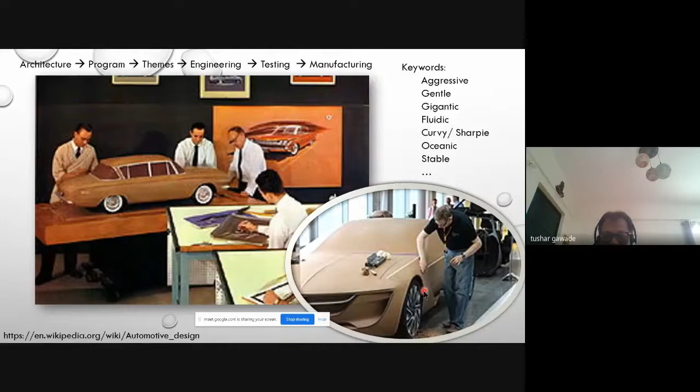So this is a specific clay. With the clay they develop it, and this is done as the physical reality, which is translation of the sketches to some 3D object. Now coming to what happens with the exterior - does the industrial designer's job end there? No, they get into the interior of the vehicle also.

Now, interior of the vehicle, what it means is that the vehicle has so many systems inside it. Now somebody says it's a stable vehicle - how do I translate that stable? If my vehicle seats look to me or feel to me a little tougher in terms of its stiffness, it is stable to me. Somebody says that I want a comfortable vehicle. Somebody can translate that comfort to the sponginess of the seat.

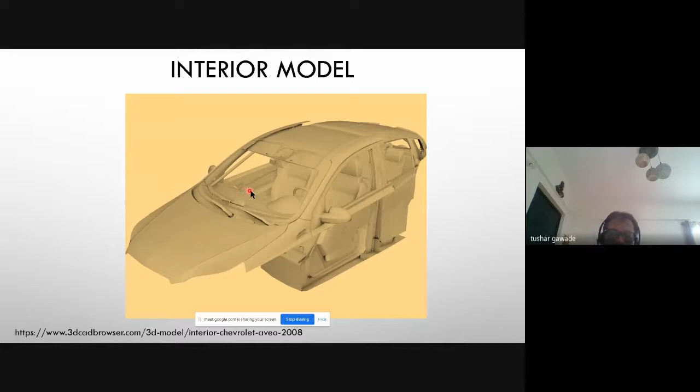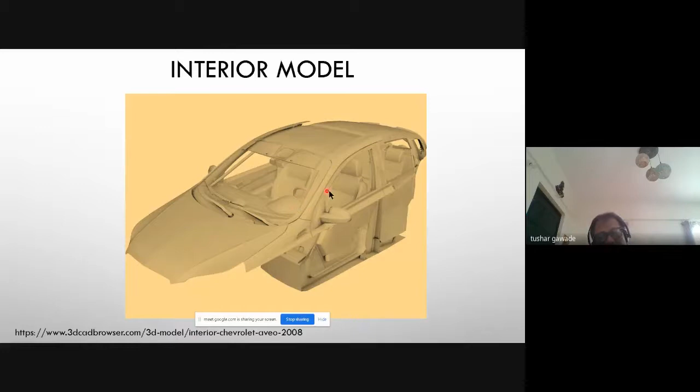Somebody can translate that gentle in terms of the steering wheel, how it looks in terms of the dashboard. So these are the translations of the company's requirements in terms of various systems, and that's the way it goes from exterior then to interior, from interior to individual subsystems. This is an example of one of the things - it's a body. So for body, this is some kind of rendition they prepared.

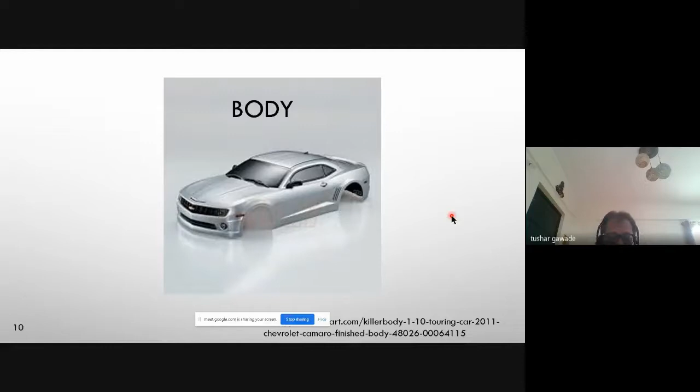After a brief of design, I get into the world of engineering. In the engineering world, they also develop some kind of models, prototypes, and layouts. What are these models, prototypes, and layouts? For the engineers, these are either the prototypes made with metal, wood, or some material which is a physical world, and they translate that to initially non-moving parts. Then they create the subsystems which have all the mechanisms and that thing.

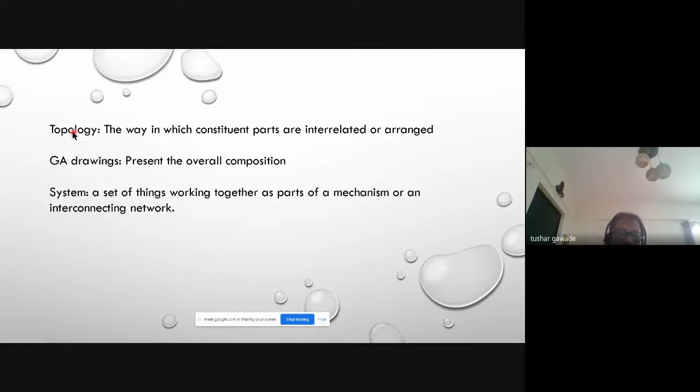Before going to the details of that, they also use some terminologies. All these engineers who translate - automotive engineers, mechanical engineers, electronics engineers, or mechatronics - the topology is the way in which constituent parts are interrelated or arranged, that's the thing. In general, from vehicle to vehicle, these do not change a lot. However, there would be innovations in terms of these arrangements, and making this arrangement makes the vehicle unique in terms of maybe the engineering aspect or maybe the customer related aspect.

The engineers develop the GA drawing, general arrangement drawings. It presents the overall composition, how the different systems are arranged. Now, when I say system, what I mean is a set of things working together as parts of a mechanism or an interconnecting network.

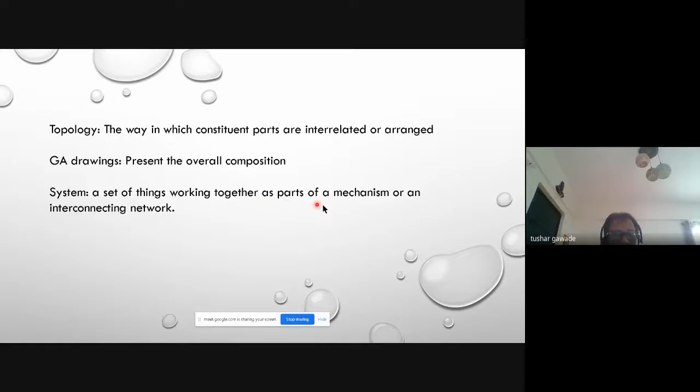The rigid chassis includes the frame, which is the basic structure on which everything is put. The seats are included. For the electrical engineer, those are electrical systems. For the safety engineer, those are safety systems. So there are so many systems - it's a complex machine which has approximately 30,000 parts. It's huge in terms of the parts and systems.

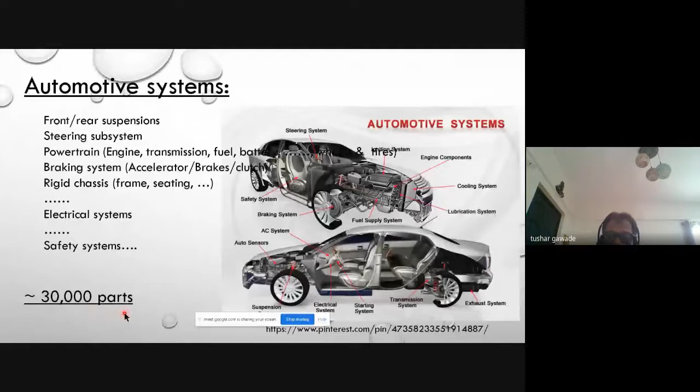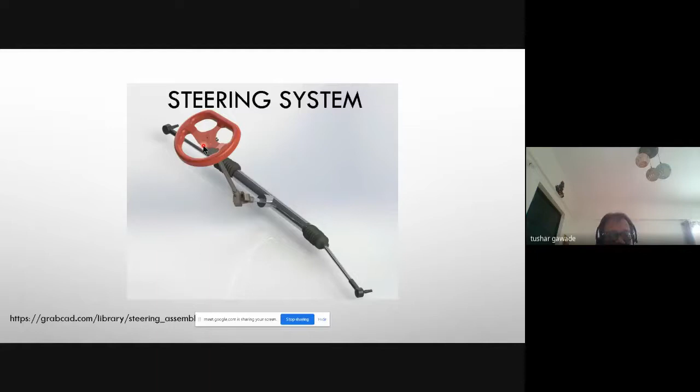I'll take one example to show you what it is. The customer looks at the steering as a D-shaped steering, maybe three arms, three spokes to the steering, and on the top of that there could be the interfaces for the customer, which are called horns. From there, these are the visible things up to the steering column.

After the steering column, it goes into the underbody of the vehicle, to the rack and pinion steering arrangement, and then finally through the tie rods to the steering system. Why am I showing these things? Because in the next topic we are going to need these systems.

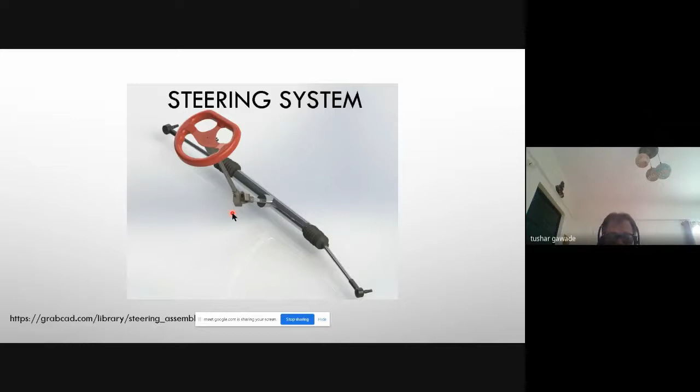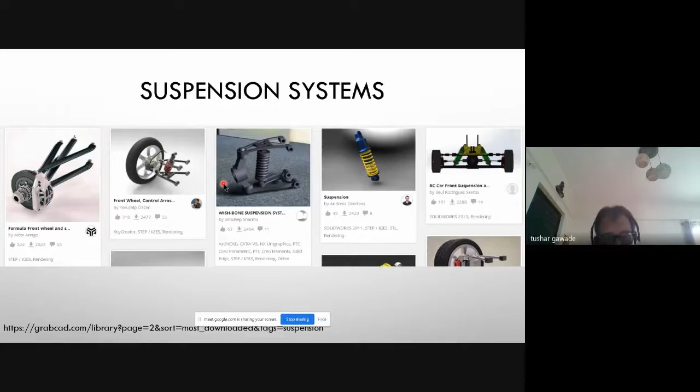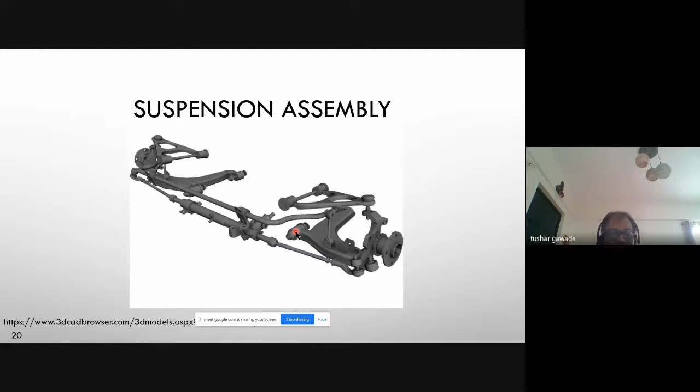Now all these points of attachment are required to connect with the next system. As I talked earlier, the vehicle is a combination of multiple systems. So all these individual systems are modeled by the CAD designer, initially as parts, and from parts they are connected appropriately with proper orientation and location. Once the CAD designer's job is over, the vehicle dynamics aspect is to be evaluated.

Before getting into the subject of vehicle dynamics, let's talk about what a vehicle is. It's a thing used for transporting people and goods, and especially we know these vehicles as cars, two-wheelers, carts, trucks, or any of those, maybe land vehicles. When I talk about dynamics, it's a branch of mechanics concerned with motion of bodies under the action of forces. So it has to deal with the forces.

The branch which deals with the mathematics of motion and forces, which I talked about here, is a branch of mechanics. So what is mechanics? It's a branch of applied mathematics dealing with motion and forces that finally produces the motion. So here the motions are concerned, here the forces are concerned.

There is something called multi-body systems. When I showed earlier, there are different parts. Those different parts are different bodies, so that's a multi-body system, bringing that system from the earlier thing. It's a study of dynamic behavior of interconnected rigid or flexible bodies.

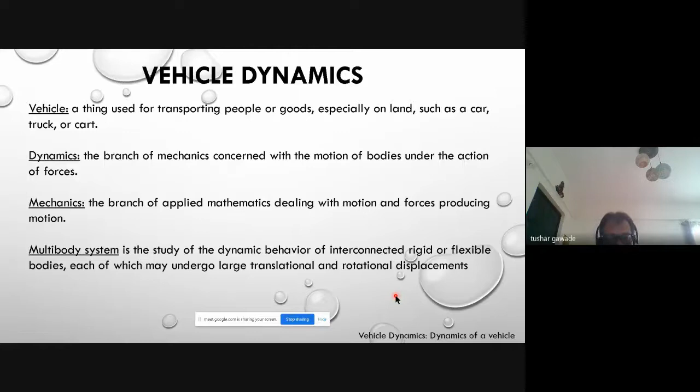As we saw, we have multiple systems interacting as a vehicle assembly. The parts are connected, we get subsystems. Now the subsystems we talked about earlier - if you talk about the transmission system, it will have an engine, and the engine itself will have multiple systems. Then another system will be the gearbox, then the drive shaft, then the wheels, tires. So multiple systems are there in the transmission system, and finally this transmission system is part of the vehicle assembly. So many parts, approximately 30,000 parts, give rise to so many systems, and finally you have one assembly to deal with, which is the vehicle, and this vehicle is used by the customer in terms of its feel. Now that feel could be a comfort aspect or a handling aspect.

For vehicle dynamics, you really don't need parts with exact geometry, and visualization of all those parts doesn't need to be realistic. I already introduced the concept of components having joineries and different joints. If we know those joints, their locations and orientations, that's good enough for vehicle dynamics engineers to proceed. However, when vehicle dynamics results are being interpreted, visualization of all these parts adds to the reality, so somebody who is not from this world but understands the subject, from the automotive background, can understand it.

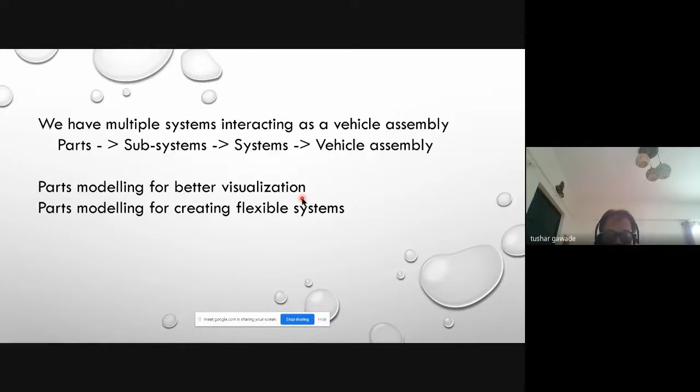Now why do we study vehicle dynamics? We study it to understand the behavior of the vehicle. Why understand that? Is my vehicle safe? Is it comfortable for the occupant? The vehicle moves on the road, so it has to take care of pedestrians and animals outside the vehicle. It has to be safe for occupants, and it should not harm outsiders if the situation or circumstances arise. That requires understanding of vehicle dynamics.

As we said, vehicle dynamics deals with the forces generated from the vehicle and motions. After understanding that, what's next? We improve the aspect intended. What are the aspects intended? For the vehicle dynamics engineer, it could be handling of the vehicle. For the safety engineer or crash guy, it would be safety of the vehicle. Somebody from the vehicle subsystems called seats would look at comfort. Somebody from noise and vibration background looks at noise. So there are many disciplines and expertise required to design this vehicle.

Now all these inputs of vehicle dynamics, for each respective discipline, require different input-output. So all those different input-output systems are modeled in vehicle dynamics, and the intended outputs -- safety, comfort, performance, noise -- are post processed by the respective engineers.

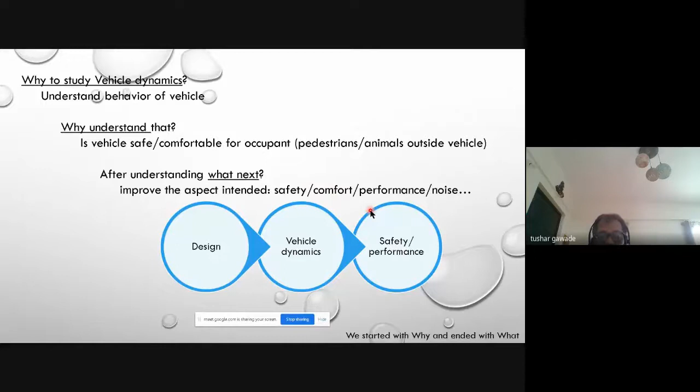Now we have started with design, we are now into vehicle dynamics, and later on we'll be going into safety or performance. So we started with why vehicle dynamics is required, and on this slide we reach what it is, and what's next -- how do we do this journey from vehicle dynamics to the next stage, which is the safety aspect.

Now for vehicle dynamics, there are two aspects. One is vehicle simulation, which happens inside the computer labs and includes the systems and full assemblies -- simulations carried out with the vehicle assemblies. For the testing people, it starts in the lab and happens in the field, called proving grounds or test grounds.

And finally, all this work which happens in the lab and in the field needs to be correlated. So finally we end up having only the simulation world, or the CAD models, mathematical models of the vehicle systems, and we remove or eliminate or reduce the testing world. Why do we need to reduce this? Because the cost involved is too high, the effort involved is too high, the people involved is too high, and uncertainties are also very high.

When I talk about uncertainties, that's the place where the testing world dominates in terms of engineering discipline. When we get to the validation slide, I'll come back to this statement -- that the testing world dominates, and that's called the expert riders, who have very high importance in terms of what they say, based on their experience of thousands of hours with the vehicle.

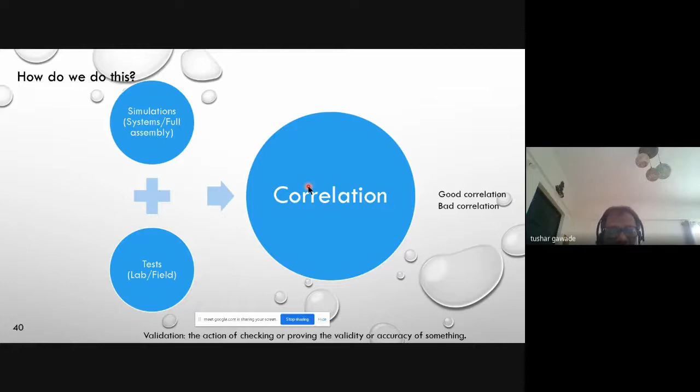So force and displacement of the spring in the simulation world, and force and displacement from the lab world, are brought to the same graph where x-axis is displacement and y-axis is force. We see the subjective nature of it, then go to the objective nature, the specific magnitude of force with respect to different displacements. Then we call it good or bad correlation.

The action of checking or proving the validity or accuracy of something is called validation. That's what I described as good correlation and bad correlation.

The things which are not correlating good, the models are updated so that the correlation is taken to the maximum limit or acceptable limit. The world of maximum limit has gone today; people call it acceptable limit, and within the acceptable limit, it is good to take decisions and move ahead.

We don't look for increasing the correlation from 90% to 92%, 93%, 94%, and so on. If 90% is there, in many situations the things are good to go ahead and take the decision. And that's the importance of doing simulations—you get quick results and quick directions to move ahead.

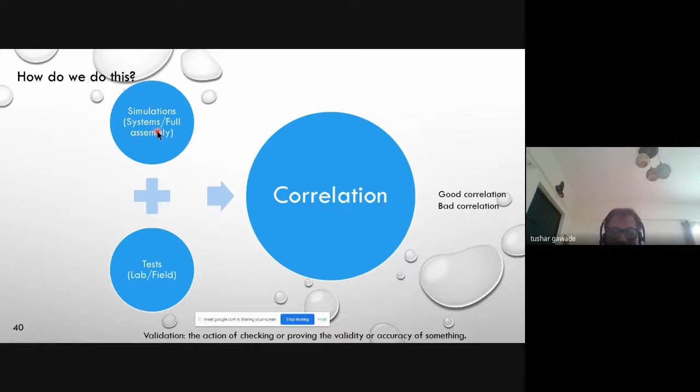Coming to the next aspect, which is the testing lab. In the testing lab related to the vehicle, what do we do? For testing of the vehicle, we look at various parameters. I have listed a few here.

The mass of the vehicle, mass of parts, mass of subsystems, center of gravity of all these—parts, subsystems, and the vehicle. The inertia related aspect, that is moment of inertia. Then for suspensions, we call it K and C—K stands for stiffness, C stands for damping.

The tire characteristics—this is a very complex world, and even the experts who wrote books on tires do not claim to understand this component 100%. They still say they are learning. Also transmission characteristics and steering gear ratio.

So these are different terminologies and characteristics required for vehicle dynamics to be understood, and these are measured in the test lab.

I am showing one example: suppose I have a vehicle assembly. With this assembly, I need to know at the vehicle level where the center of gravity of this vehicle is. This is an extract from the IS standard 13849. This is a four-wheeler—the front axle is here, the rear axle is here.

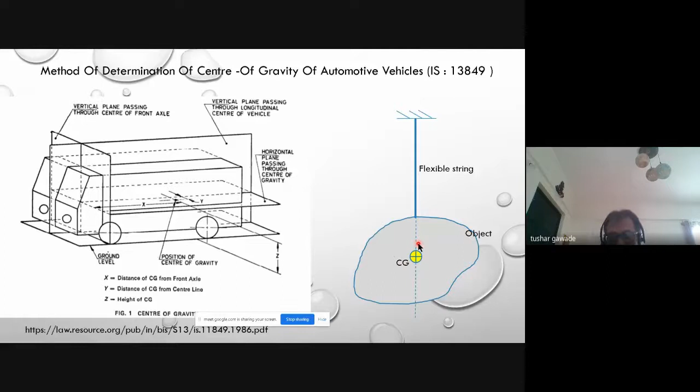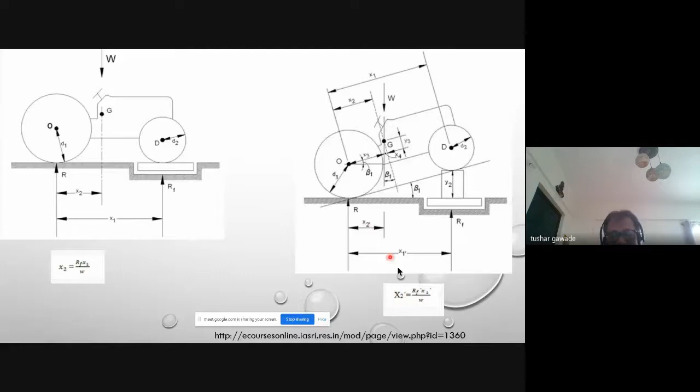Now the same equation appears to me as X2 dash is equal to RF dash into X1 dash by W. So my X2 dash would lie through this. Now I mark a vertical line through this X2, and wherever my earlier line was here, this is my earlier line and this is the new line; that point of cross section is my G, the center of gravity.

Now, if you do the same thing across the left and right tires, you would get its location along the lateral direction. But in most cases, the center of gravity for vehicles is at the central median plane. So it doesn't differ much because the systems are symmetrically placed, and it is quite in close proximity to the central median plane.

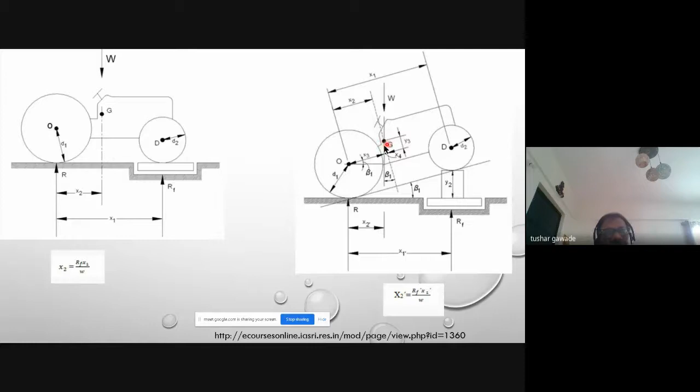Now, the next parameter which we talked about was inertia. For inertia, we learn in our theories that a simple concentrated mass attached with an inextensible string of length L, if we give it a small oscillation, means we remain within the bounds of sine theta approximately equal to theta in radians.

So if we remain within maybe 3-4 degrees of oscillation, and plot all those values from this experiment, the theory tells us that torque equals I into alpha, where I is the moment of inertia and alpha is the angular acceleration. Finally, what we get is the time period for this simple concentrated mass. This time period, through all these equations, is related to the inertia.

In the practical world, we don't come across this kind of object. We extract the theory of this to the real world. Now this is a real world example - this is one of the test labs from IIT Roorkee, and this is a two-wheeler. What they have done is attach one string on this side and another string on this side, and this is another way of measuring the moment of inertia.

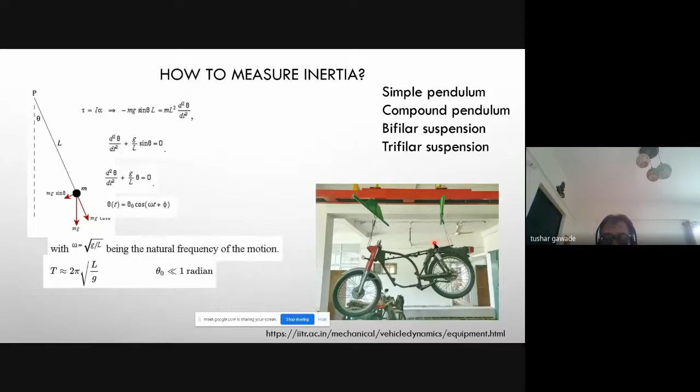When we say that this is trifilar, there are three strings put to it, and then the platform rotates about its vertical axis. That's a trifilar suspension.

For vehicles like cars, which are huge in terms of area and mass, they are put on this kind of platform, and then they are given oscillation in this direction. This point A is the point of axle, which is a frictionless axle, and it is connected with the strings here, which are again inextensible strings.

The purpose, when I say inextensible string, is that this L, which we are saying, remains constant. That's the meaning of inextensible string. We don't want to land up in a complex world when this L keeps on changing. When we have a freedom to keep it simple, keep it constant, we do that. That's why this is an inextensible string.

And for a platform which is empty, the inertia is obtained by this equation. It goes through the derivations of all those things, and finally this is the result. When you have a car put onto it, the car mass goes into this equation, which is m car here, and you get the inertia about the axis passing through CG.

Similarly, for the car, you get three inertias: roll inertia, pitch inertia, and yaw inertia. When the car moves left and right, up and down, that's the roll. The car keeps moving up and down with respect to its front end and rear end, that's pitching. The car keeps turning, that's yaw inertia, and then the products of inertia would also be there.

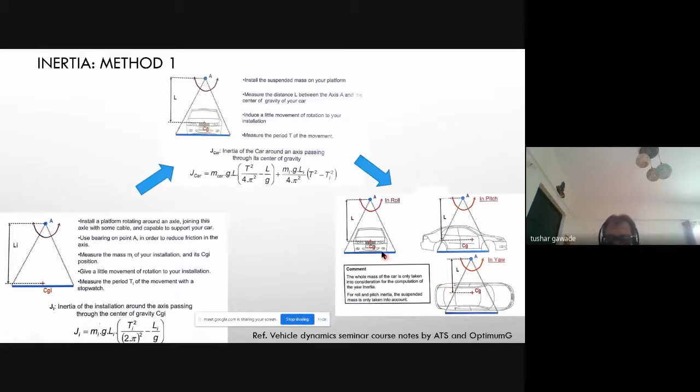So this is about one method. The other method is the tri-filar suspension.

The CG of the platform is here. We measure the car's CG and coincide that with this. Once we do that, we put the car onto it and give the rotation, which is again a smaller oscillation.

And with this, we measure the time period. So T is the time period with the car on the platform, and Ti is the time period measured without the car. Finally, you have all those parameters: M car comes from the mass of car, Mi comes from the mass of the platform, L comes from the length of the strings, and others like gravitational constant and pi are the constants.

So this is another way of measuring the moment of inertia.

The other systems in the car are called the suspension system. In the suspension system, you have springs. As I talked earlier, you get the force and displacement. Now in a simple method, what do I do?

For the spring, if I have this spring initially, I put a weight onto it, it gets compressed. Now I have the weight, I know the displacement of it. Finally, the spring stiffness is nothing but force upon displacement.

So I plot that thing, and this graph shows one slope, then another slope. This one is stiffer, initially softer. So car springs or bike springs are in general dual rated.

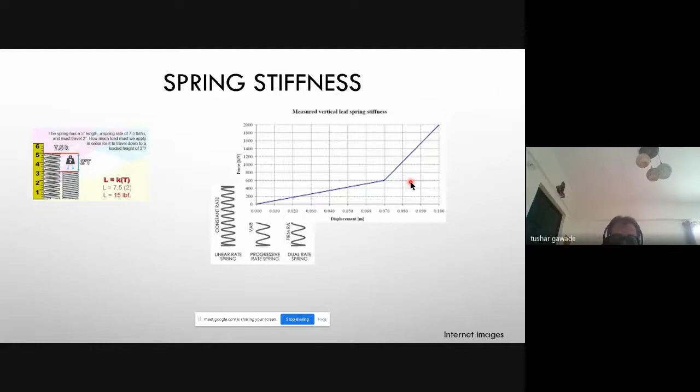This progressive term is common in terms of spectacles also. There is a progressive lens. What they do is vary your number in terms of the vision which you move through. So it's quite synonymous to that.

Coming to the next, which is the damper. Now, the spring which I showed earlier, this is a coaxial thing. The damper and spring are coaxial. For measuring the spring stiffness, the damper is made absent.

How to make the damper absent is that you take out the damping fluid from the damper, drill it, take it out. This helps you in guiding the spring, and you measure the spring displacement, and a force transducer will be there, so you get the spring stiffness.

For the damper, to measure, you take out the spring from the damper and then put it here. At the bottom of this, what is there? There is a motor, and the motor connecting rod is attached to this, and this damper keeps moving up and down.

Now we know that something rotating with a radius r and angular velocity omega would reach a velocity v. So v equals r omega, that's basically the velocity.

The damper's characteristic is force on the y-axis and velocity on the x-axis. The velocity comes from this equation, based on the rotation speed of the motor and the radius at which it is attached, which is half of the stroke.

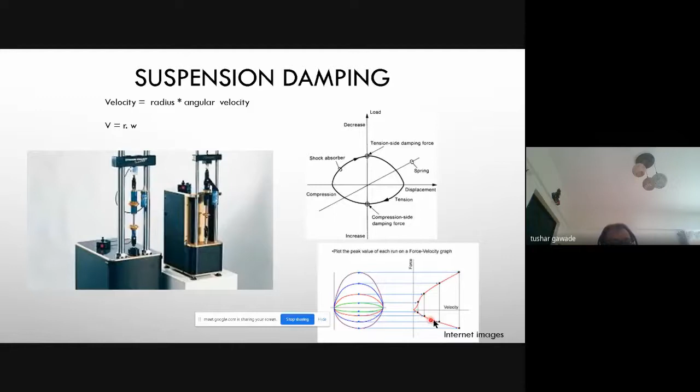For that particular velocity, what is the damping force? That damping force is plotted here, one in tension and the other in compression. From this suspension measuring machine, you get curves like this. The green curve is for one velocity, red for a higher velocity, then blue, then magenta. So you plot the force-displacement and force-velocity curves for the damper, showing tension on the top side and compression on the other side.

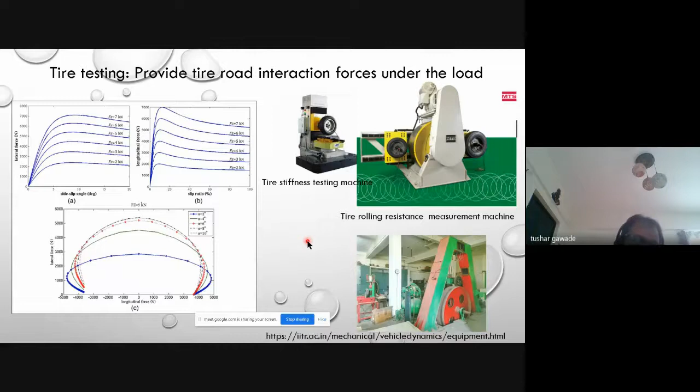So all those forces are measured with respect to the different variable which is on the x-axis. There is something well known in the world of tires called the magic formula, designed by Dr. Pacejka. This formula, when you do not have most of the data related to testing, relies on research findings.

It has different constants, D, C, B, E, all derived based on the research, and this research is for specific tires of different sizes, smaller and bigger tires, and from that you get this Y property.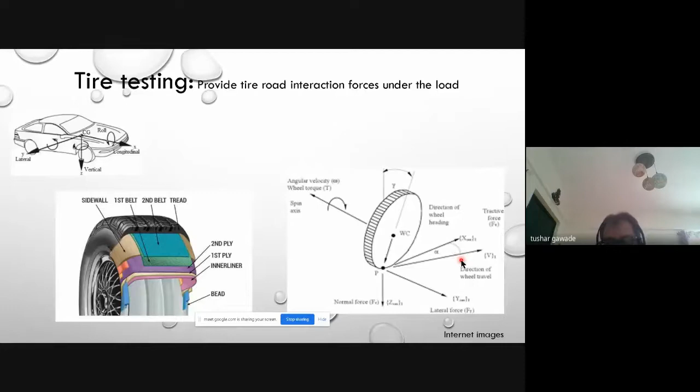Now what is this Y property? Y is the property on the Y axis. It could be longitudinal force, normal force, or lateral force. And X could be the slip. What is slip? Earlier I said the tire is supposed to go in this direction, but it travels in this direction - that is called slip. So all those things are put in, and you get the different tire properties.

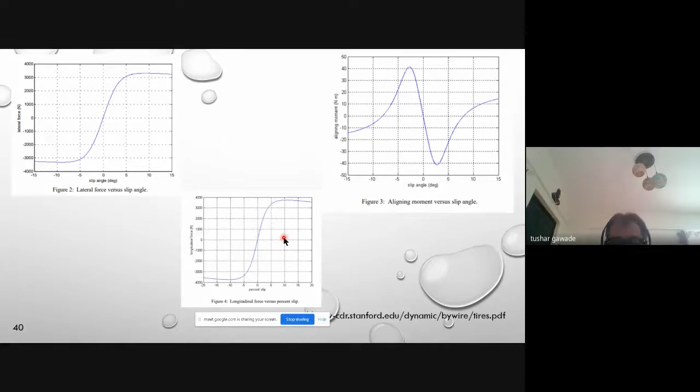What are these different tire properties? As I said, it looks like a lateral force here. This is aligning torque, and the longitudinal force. If you see, the nature of these two curves are similar, because those are lateral and longitudinal forces. Since the nature of these two curves is similar, it's possible to capture that with a single formula that could have different constants, and that's the work involved in this magic formula.

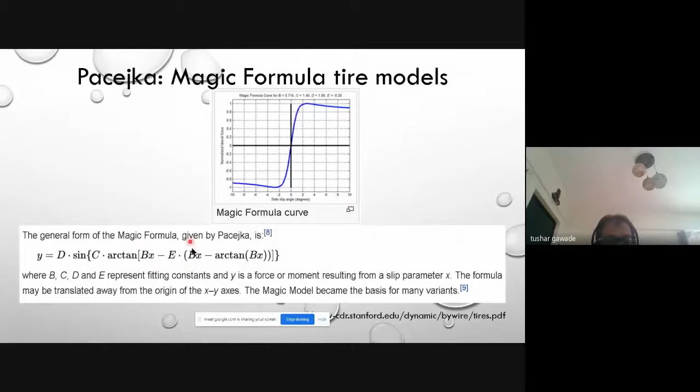Now, when all these things happen in the test, who does this testing? This testing is done by expert riders in the field. I'm talking about vehicle level testing. This evaluation by expert riders goes majorly by their feel and experience of their input.

Now what inputs do these people give to the vehicle? When they are on the vehicle steering, they give steering maneuvers. They have other controls in their hand like ABC pedals - accelerator, brake, clutch, and different gears. So with respect to all these driver-given inputs, how the vehicle reacts is their feel.

Now why is their feel important? Because their feel is not related to one vehicle - it cuts across all vehicles produced by that company. Every company also purchases vehicles from competitors or from the different world of vehicles, and they drive and interpret the behavior of the vehicle. Apart from experts, general customers also drive, and their expectations and feelings are captured and translated into the understanding of the expert rider.

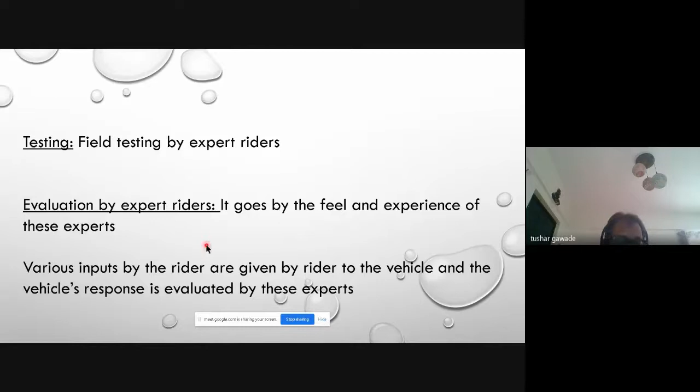What are these different testings? These involve standard testing procedures. This is a skid pad. On the skid pad, the vehicle is driven into a circle. When driven into a circle, this circle radius is kept constant, then reduced, then increased. That's the skid pad.

The name comes from skid pad because if you keep the speed constant and keep reducing the radius of this circle while driving, at one point the centrifugal forces make the vehicle skid. That's the skid pad. The figure 8 turn - as you see, the shape of this test track is like the number 8.

When you see this as an 8, it looks like two circles, but when you drive it as a vehicle, you move from here - when you go here, you take a right turn, when you move here, you take a right turn, come back again to the center. Now when you go into this circle, you take a left turn. So it's a combination of left and right turns. In the other test, it's only one kind of turn - if the person goes in the opposite direction, the left turn converts to a right turn. So both left and right turns are combined here.

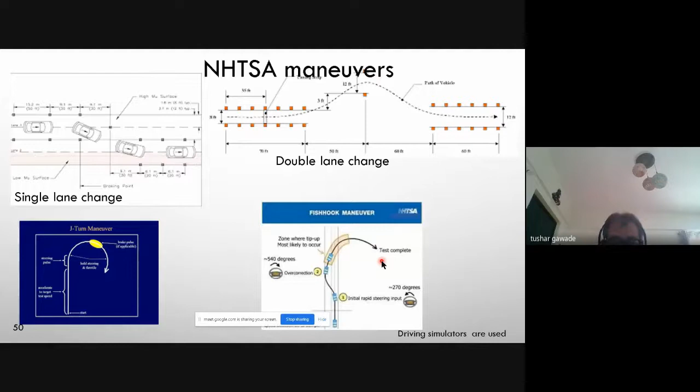What is rollover? One set of wheels, the inner wheels, gets lifted because of centrifugal force, and the reaction on the inner forces goes to zero, and the vehicle goes into the turn and rolls over. So the intention of most of these maneuvers is to study the rollover behavior of the vehicle for vehicle dynamics engineers.

Now coming to the other part of it — testing, field testing with dummies. What we talked about earlier is that for all these turns, somebody who is an expert rider sits in the vehicle. Now, as we said earlier, the intention is to get rid of most of the cost related to various aspects.

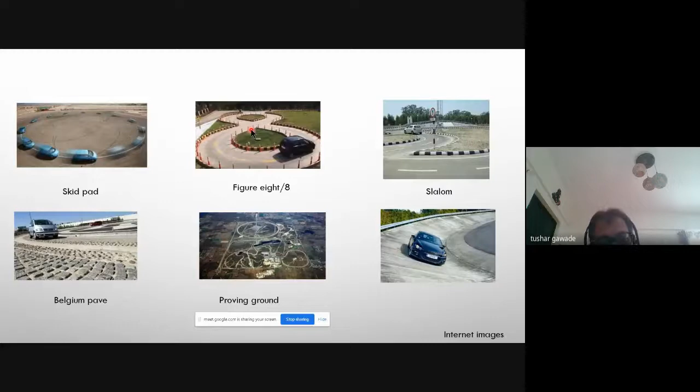One of the aspects is test riders and testing people — so can we eliminate them? We cannot, but we can standardize their understanding in terms of engineering parameters. For that, we have dummies which behave the same all the time, because the dummy remains the same, and these dummies are validated for different testing.

For testing, SAE J211 is the standard, and part 1 is used for electronic instrumentation, part 2 is used for photographic instrumentation. The electronic instrumentation is required to capture all the parameters we talked about earlier, the force, displacement, maybe the velocities or the angles. All those things are measured with electronic instruments, and for that you need force transducers, torque transducers, LVDTs, and so on.

For photographic instrumentation, you need something called a camera. How to use this camera, what speed or frames per second it has to have, what orientation it has to have, what all angles it has to capture, all those things are decided and then standardized. So there is a standard part 1 and part 2: part 1 for electronic instrumentation, the other part for photographic instrumentation.

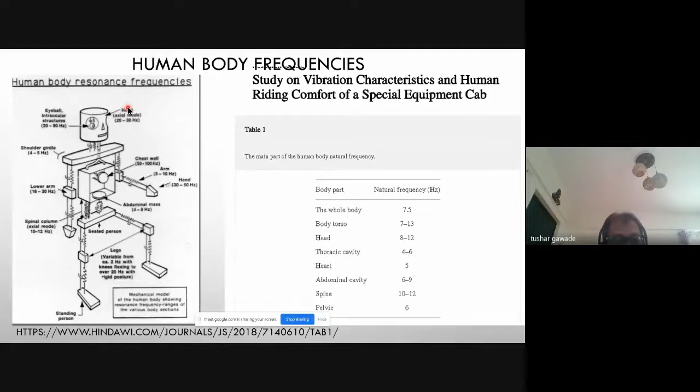These are different frequencies. In general, when we get all this data, it has a lot of noise. The signals, as we saw earlier in graphs, appeared smooth, but when you get data from the experiment, they are not so smooth - they have a lot of noise. So all that noise needs to be taken out, and only the frequencies of interest are to be considered.

So signal processing is another area, where after the data is captured with all the data acquisition systems, the data needs to be post-processed. For post-processing, there are various filters, and these filters have different theories in terms of frequency class response and that thing.

For whichever component of the body we are interested in, we take the signal from that component's sensor. If it's the head, there's a sensor in the head. If it's a component from the chest, the signal from the chest sensor is taken. These are modeled as different components, like the lower leg, the knee joint, and the ankle joint. All those components are fitted with sensors.

The signal from those components are post-processed, and there is a nicely developed theory for post-processing. That input is available in SAE J211, which is from the electronics parts side of things.

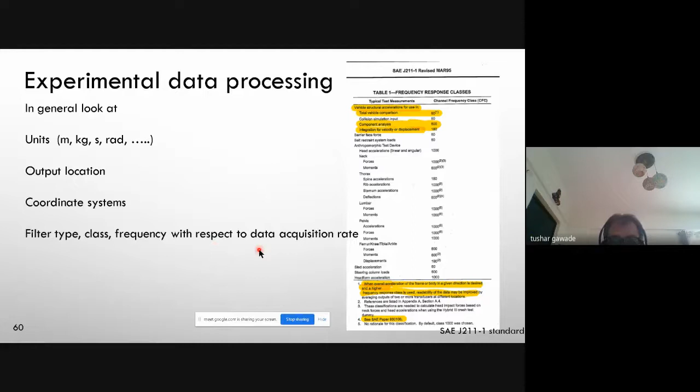In terms of the coordinate system, vehicles follow the SAE coordinate system, and you need to match that coordinate system into the simulation also. If they do not match, in post-processing you need to flip those axes to match. And finally there's data filtering - all the frequency classes and data need to be post-processed so that you come on the same platform.

Coming to the simulation part of it, vehicle dynamic simulation - this I'm showing is from the Adams software, shown as a full vehicle assembly.

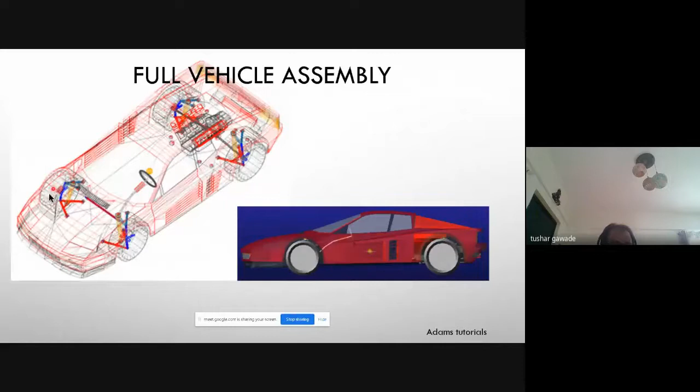In this you can see the steering system here, there is a suspension, tires on this side, and on the rear side you have the rear tires. This is a complete vehicle body, it will have a frame here. This is another picture of the simulation.

Now in the simulation, initially we talked about the suspension system, and I showed you some points which are the joints and axis - those points are of importance. This is one hole in the lower arm, this is another hole in the lower arm, this is a third hole in the lower arm. If we have these three points, we just connect them as three lines and call that a link.

In simulation this is okay - you don't have to have the physically similar looking part in the simulation, but in terms of its coordinates you need to have the correct geometry, in terms of only the hard points, as they're called.

Markers are nothing but something like this triad, X, Y, Z - these are the axes. This axis needs to be oriented here, because if we are interested to know the rotation of this lower arm, we need to know rotation about what axis and in what frame. So you need to locate that, and that rotation from the test has to match with this. You need to locate it based on where the experimental sensor location is.

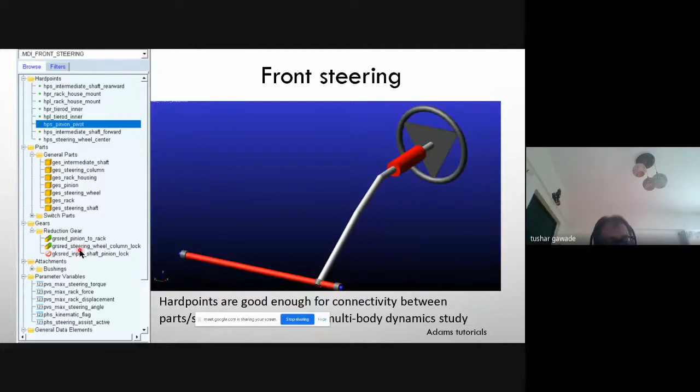For the simulation, it has hard points. Hard points are nothing but, as I already talked about, the different joint points, or points for different interfaces - those are the hard points. There are different parts and different joineries. So this is about the steering joint.

Now, all these subsystems you test initially as subsystems and then as a vehicle system. All these subsystems are tested individually, validated with the test results, and validated subsystems go into the vehicle.

The test rigs available in the simulation are slowly increasing steer, J-turn, road edge recovery, single lane, double lane, and whatever we talked earlier, including that steering pad test number 8 - all those things are available in the simulation also. So you don't have to model that test rig here, and those are called in the simulation language as test rig. Those are standard tools available.

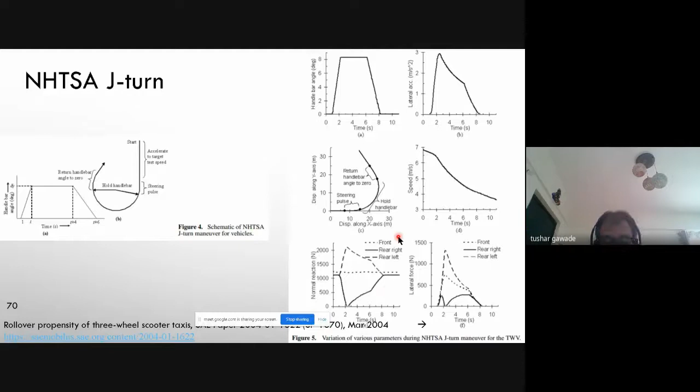Coming back to when you have the simulation and test results, the correlation what I talked earlier - output of testing and simulation are correlated here. For correlation of this...

When the outputs are having some deviation, we as vehicle engineers, vehicle dynamics engineers, know which parameters contribute to what behavior. So they keep updating those parameters. And what are those parameters? As we talked earlier, the CG locations, the mass, suspension, tire - all those properties are updated and taken close to the practical values as and when we test.

But initially we don't have all the test values, so initially we start with guess values which are available from the earlier vehicle or from some research, and as and when we get the data from the testing, we keep adding that and then remove the deviation between the actual numbers in the simulation with the practical numbers, so we improve the correlation.

Once the correlation is acceptable within acceptable limits, the model becomes a validated model. Now this vehicle dynamics and testing expert's opinion matters. As I said earlier, the expert rider's opinion matters. Why? Because there's a clear cut difference between reality versus simulation.

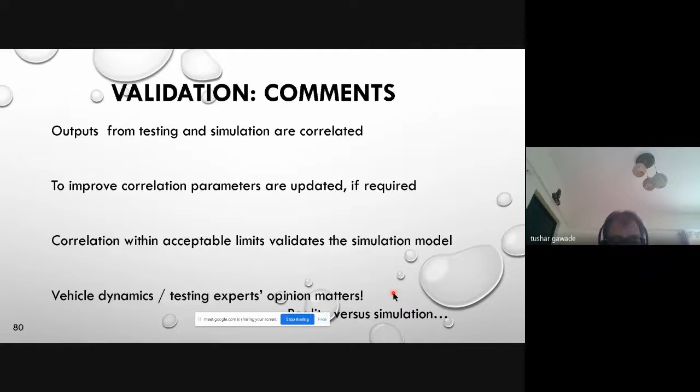However, these experts have run this vehicle or similar vehicles or other vehicles from the competitor for so many years. So they have all those number of experiments as their database into their mind, and that's why it matters. So finally, the opinion of these expert riders has importance, and it is a kind of give and take for the simulation and the testing world. But finally, when it comes to the feel effect, it majorly goes by the expert riders.

Coming to the next topic, which is the safety of the automotive. Now, this vehicle dynamics inputs are taken to the next level. Automotive safety - it's a study and practice of design and construction of equipment and regulation to minimize the occurrence and consequences of traffic collision involving motor vehicles.

So basically safety is about, if at all the accident happens, or if the accident should not happen, what kind of safety for the person inside or outside the car, living being, can minimize the damage. So there are two terms: active safety and passive safety.

Active safety means actively we do something so that the accident will not happen, the skidding will not happen, rollover will not happen, the crash will not happen. So the technologies which help in assisting and preventing this crash, those are in the active safety domain.

Passive safety is if the vehicle does not have active safety features and it meets a crash, or rolls over, or even having all these things also, input from the occupant or from the environment—like road ditches, holes, protrusions, surface—those are not in control of the occupant. So if something goes beyond the occupant's control and results in a crash or rollover, the damage to human life and property has to be minimized. The features designed to minimize that are called passive safety.

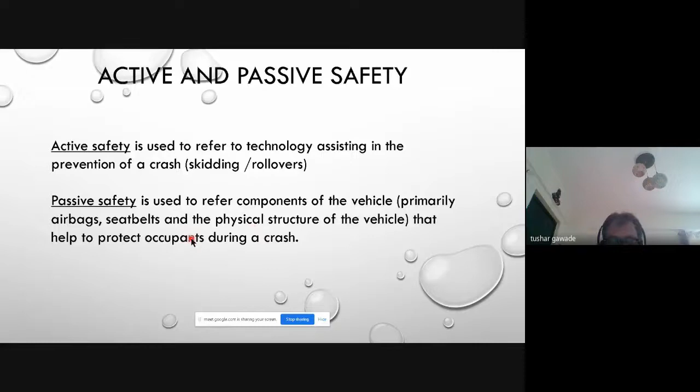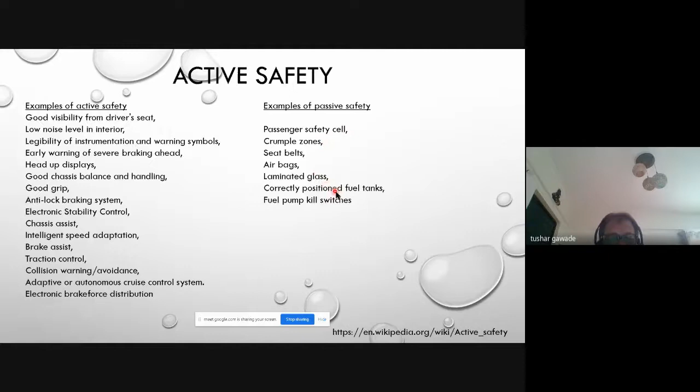Getting into passive safety, on the passive safety system side, the vehicle structure, seat belts, airbags, and other components which could reduce damage to the occupant are listed here—the passenger safety cell, crumple zone, seat belts, airbags, and that kind of thing.

Now, output of vehicle dynamics goes to the safety study, as I said. What it means is that we have a validated model from the simulation, and that validated model has state variables. As we said, the coordinate system is X, Y, Z. Along this X, Y, Z, displacement, velocity, acceleration, or rotations—those may be translation or rotation—those are captured from the vehicle dynamics model.

Because the vehicle dynamics model takes into account large rotations and displacement. When it comes to the safety model of the vehicle, it includes FE mesh, and these finite element models are much slower to run on any big machine and take huge time, and they do not handle large displacements. So how is that gap bridged?

You take the vehicle dynamics simulation output, and that output you give to the CAE model, and that CAE model you make roll over or crash with the object, and finally check what are the injury parameters to the occupant.

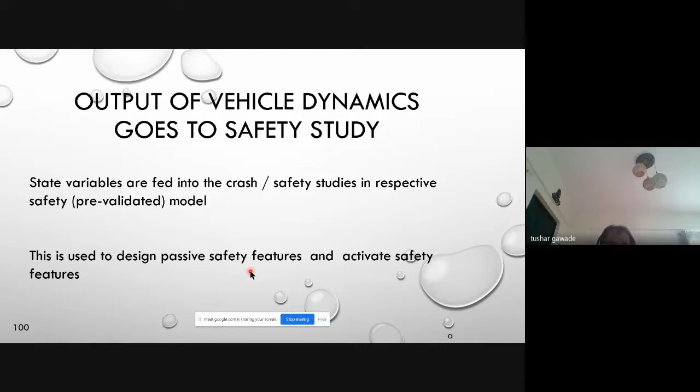That's what I wanted to take you through—from the design through vehicle dynamics and finally to the safety aspect of it. If you have some questions, I'm open for it.

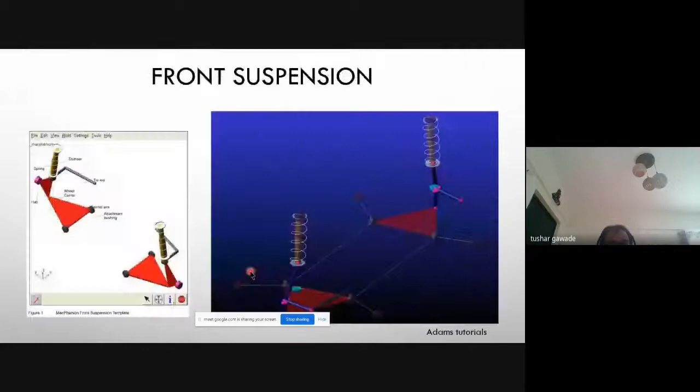So the fifth percentile relates to 5 feet and 50 kg, meaning 5 percent of the population will be below 5 feet and 50 kg. The 95th percentile is 6 feet 2 inches and 100 kg, meaning 95 percent of the population will be below this. That's the significance of this.

And those are the corresponding values taken for the dummies. These physical dummies for testing are developed based on a survey of a huge population, and these numbers for height and weight are available from that survey. Now, if the question is about the US population being taller and heavier...

What about the Indian population? Yes, for the Indian population there are some standards which were developed, and I came across this in 2000 from ARAI. They published similar numbers for the Indian population. However, for most simulations, people go by the international dummy standards, because that world of dummies is more progressed and mature compared with any single country's data, drawing on research from all research agencies worldwide.